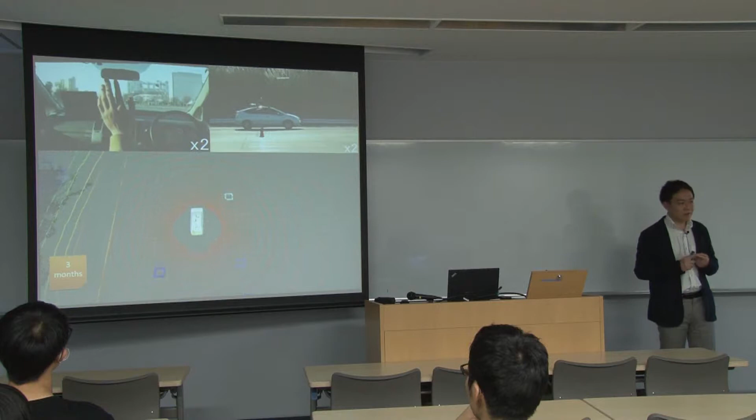But there are a lot of other sensors, such as GPS, laser scanners, round view cameras, and so on. And some people also use millimeter-wave radar. It's not a laser scanner, it's a radar. But our prototype system didn't have a radar. And it's actually up to you what sensors you want to use. So in our case, first we used only a laser scanner. No other sensors are equipped, only a laser scanner on top of the vehicle.

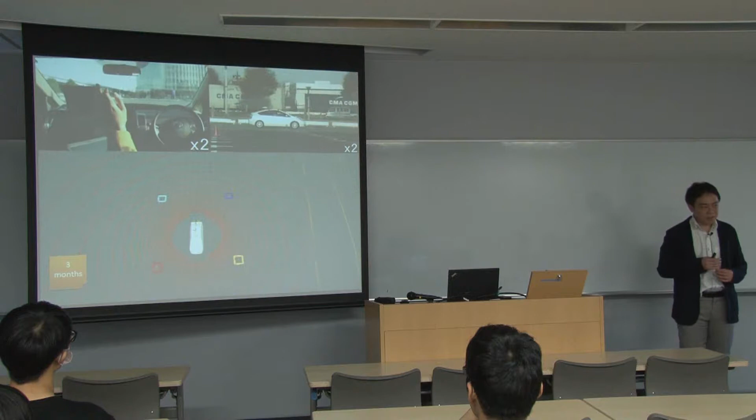And this is 3 months after we introduced the car. Only 3 months, because we made a team formation, including computer science experts and robotics experts. As computer scientists, we are very good at implementing a system. On the other hand, robotics people are pretty good at making the system autonomous. So we made a collaboration, and only 3 months after we made the formation, we made this demonstration.

This is really elementary. It's like a kid, because the car just follows the lane, and once some objects show up, it just stops, and once they disappear, it restarts. But this is the real world, not simulation. It's a real car, a real system in real time. Everything was made by ourselves actually. So this was good, pretty good.

So at this moment, we didn't have a large-scale team. We didn't have this program. We didn't have a specific project at the university. So it was just composed of my laboratory and a couple of other laboratories from other institutes. It's not an official project. It's not an official collaboration. It was just an experimental collaboration, but it did pretty well.

So we decided to make this project more official, and Nagoya University actually started a pretty large-scale national project on autonomous driving. I guess it was based on our outcome. Some of them are my students, and they are still working with me in university collaboration or university-company collaboration. So it was a good connection.

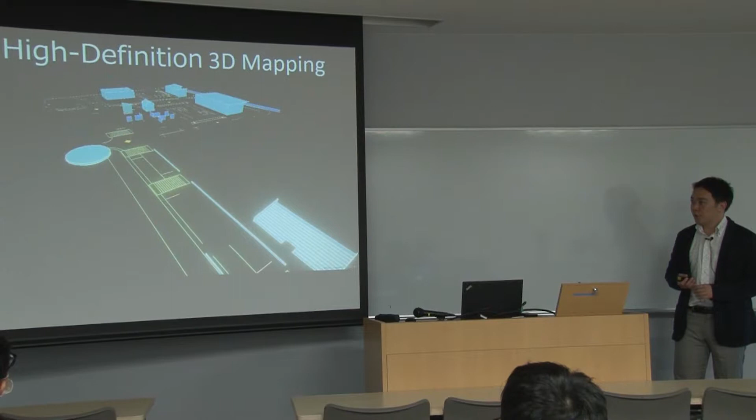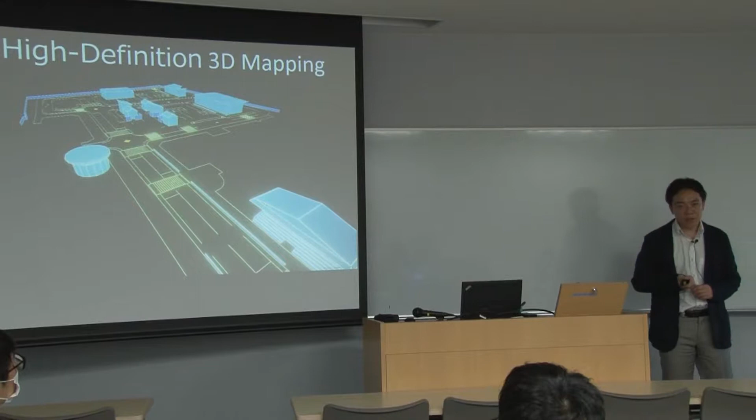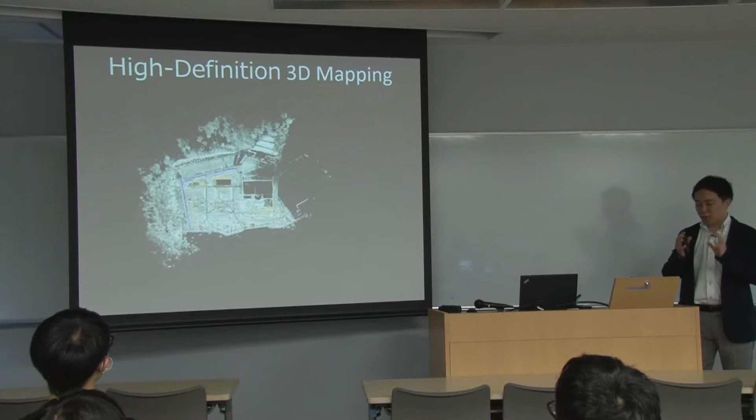So what we did is to make more analysis of the 3D data and extract richer information about where is the lane, where is the building, where is the traffic light, where is the zebra, and so on. Then let's put this extracted information back to the original 3D data. Then you get more and more rich information about geometry. So you know the shape of the place by 3D points, and you also know semantics, what, for example, the place means. Sometimes it may be buildings, sometimes it may be a traffic light.

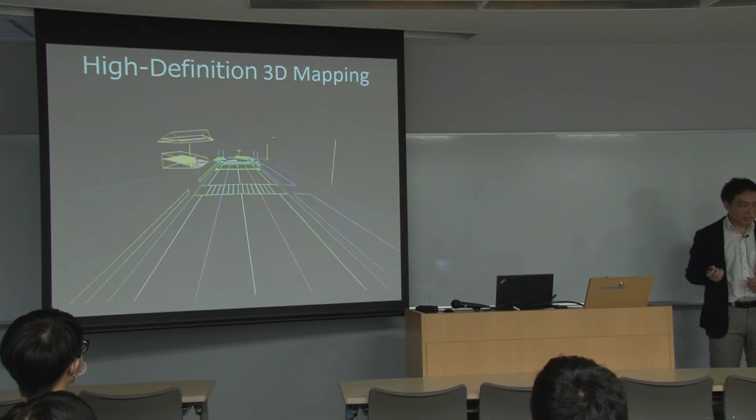And there are even virtual lanes, which were not originally on the road, right? So we extracted such information from the 3D data so that autonomous vehicles can easily follow the center of the lane.

And this was a good collaboration between university and company, because university students don't have time to do hands-on debugging or correcting or checking each piece of points. Instead, the companies are making a business, so they are totally fine with spending some time to construct such 3D rich information.

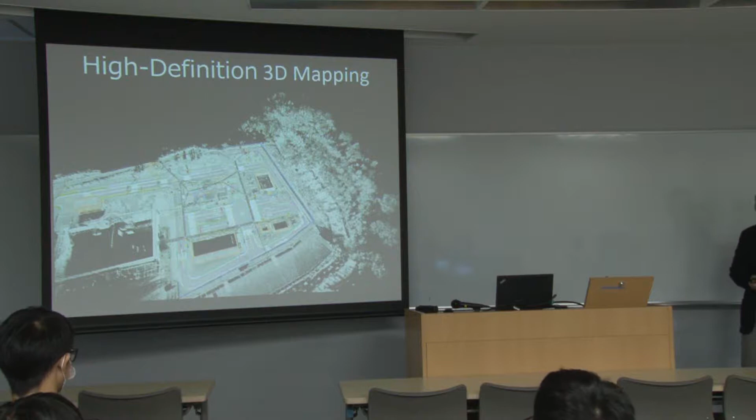And now, how we use 3D data. That 3D data has, I guess, multiple ways to be utilized. But one of our favorites is to use the 3D data for localization. Localization of a driving vehicle means that the vehicle knows where it is driving. So in order to localize the vehicle, we use 3D data, and this is the data from a laser scanner running in real time.

So actually, the data format is pretty similar to 3D mapping data, because it's eventually a collection of points. And there are lots of types of LiDAR in the world. LiDAR means laser scanner, so I use different terms with the same meaning.

And this sensing is also interesting to me because I'm not an expert in this area. When I looked at the data, it looked amazing because it can easily scan real-world data. It runs in real time. And we didn't write any lines of source code, just installed the driver and software for this LiDAR, and when we run the system, we get this data.

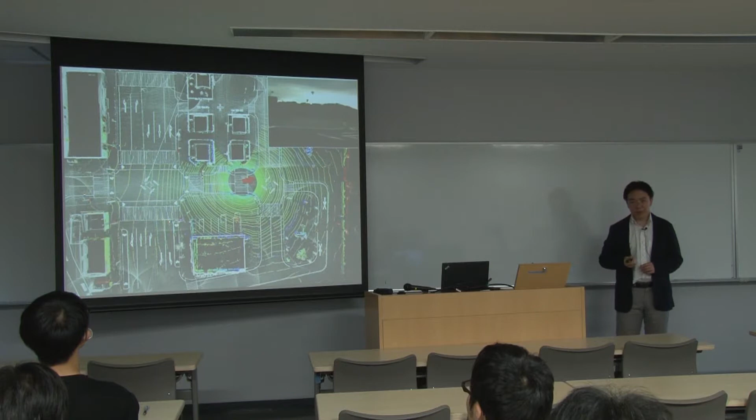matched. So we call it scan matching, and this scan matching is performed every time sensor data is updated. Since the vehicle is driving, moving, the shape of the sensing data is also changing. And every time the shape of the sensing data changes, we repeat scan matching, so that we can trace the place of your vehicle.

And here, this is not a log from driving data. This is the result of localization. We use 3D map data and this scan data by introducing scan matching in order to localize where this vehicle is located within this place. And the accuracy of localization is sufficiently high. It's a scale of centimeters. It's much more precise than maybe highly expensive GPS receivers.

So since we can localize a vehicle with accuracy on the order of centimeters, that allows us to make autonomous driving perform in a city, because in a city you need to know your precise place to the order of centimeters.

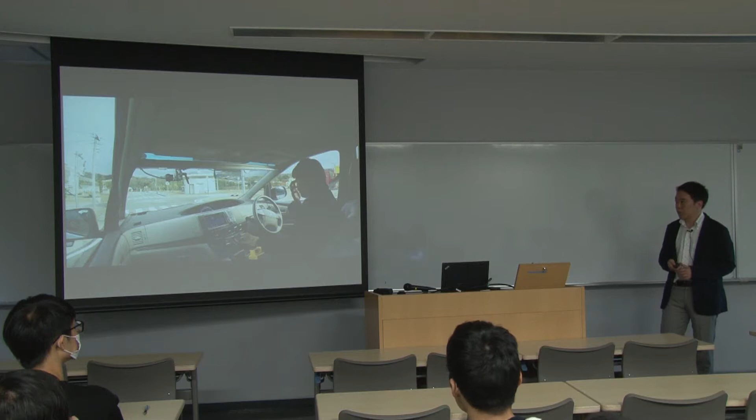So my personal interest in this project was to develop integrated software that includes everything necessary for autonomous driving: sensing, localization, detection or recognition, planning, control. Everything is integrated in the software package.

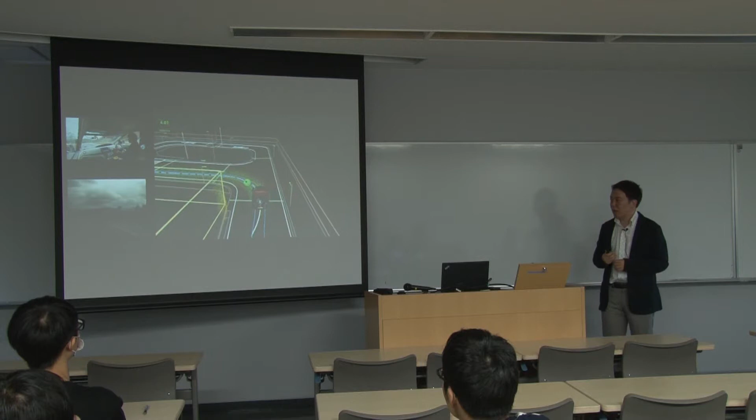And in the same test course, this is a visualization of how the vehicle can understand the real world. So 3D map information is projected, and the vehicle understands where the next zebra crosswalk is, and it also knows what route it has to follow.

In addition, yes, deep learning is maybe one of the potential technologies to make something possible which is currently impossible. And for image recognition, certainly we believe that deep learning performs very well.

For car detection, pedestrian detection, by using deep learning, we are not experts in image processing, but using deep learning tools, we can reach here without involving any experts from image processing communities. Of course, if image processing experts join the project, it can further improve. But right now, we use existing deep learning tools to understand, to recognize objects in the image.

So we are not experts in image recognition, but we are experts in computing. So for example, we like to use GPUs instead of CPUs in order to accelerate the computation. Do you know GPUs? This is somewhat a special device that can accelerate the computation of highly parallel applications. Image processing is one of highly parallel applications, so GPUs are suitable for accelerating such a workload. It is much faster than a CPU.

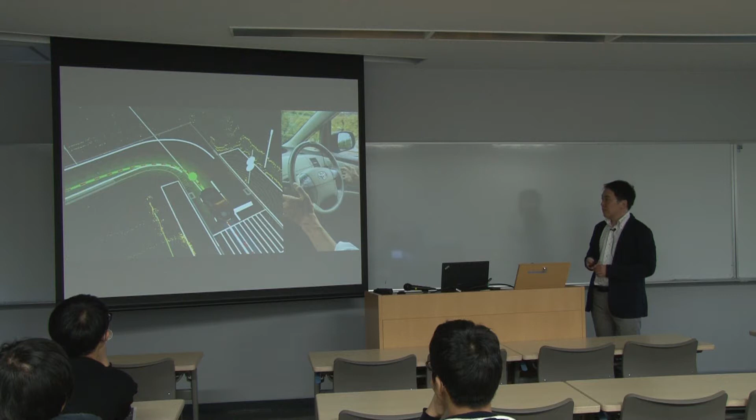One more function would be desired to make the car more practical, which is obstacle avoidance. So far, we can localize ourselves, we can detect objects, we can control the vehicle, and the car can stop. But at this moment, the car still cannot avoid the object. So to avoid objects, you have to generate a path which is not necessarily the same as the original route the car was using. Basically the car is driving at the center line of the lane, but if there is a parked vehicle, you have to change the path of your driving plan.

One of the ways to achieve that is to use spline trajectory. Since the car has velocity and direction information, you can calculate what trajectory the car can take under physical constraints. For example, a car is not a Roomba, it cannot make a sharp turn. So you have to think about some physical constraints on trajectory generation.

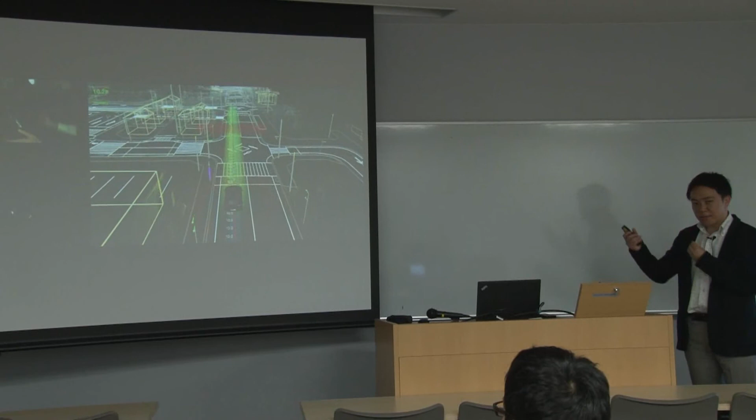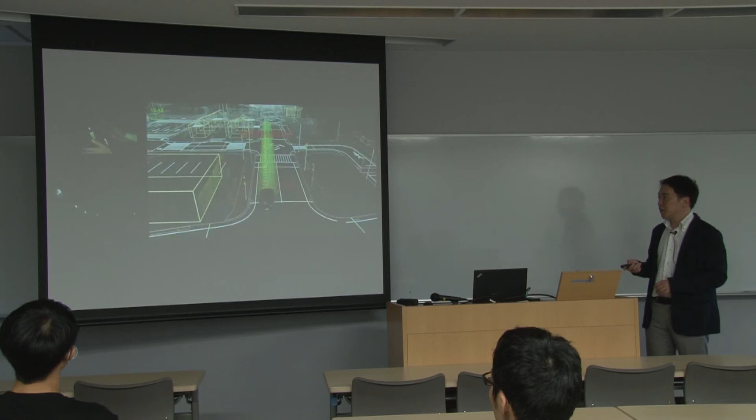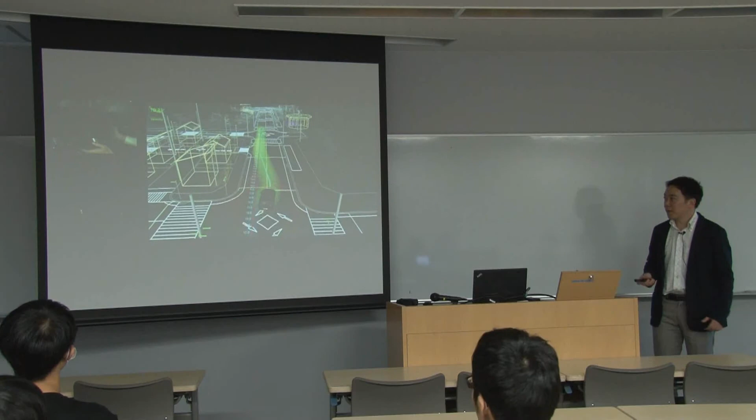One scenario where we like to use obstacle avoidance is to avoid a parked vehicle. Originally, you want to drive at the center line of the lane, but the car detects the parked vehicle here, so you have to change the path. It was selected from one of the trajectories that the car was generating. So the car is always generating this set of trajectories in real time. And at some point, you have to select one if you want to change the current path. And yeah, I can conclude.

So we published the whole pieces of source code that we developed. So if you go to the website, you can download our software, and it includes everything that I showed today. So you still have to buy a vehicle or a sensor or a 3D mapping measurement vehicle, but once you have such a set of hardware, you can implement by yourself, for example, localization or detection or trajectory generation or vehicle control.

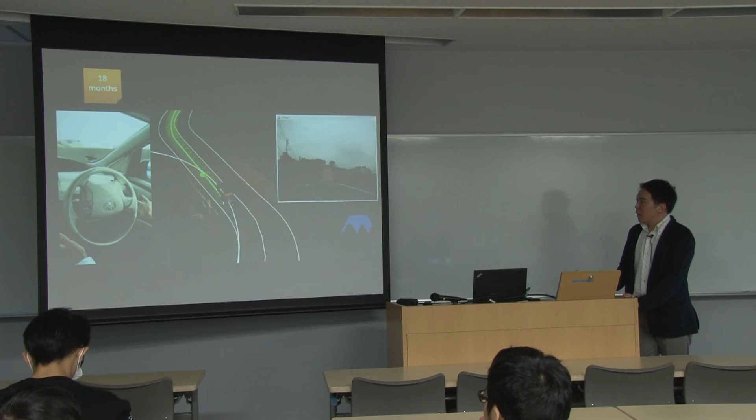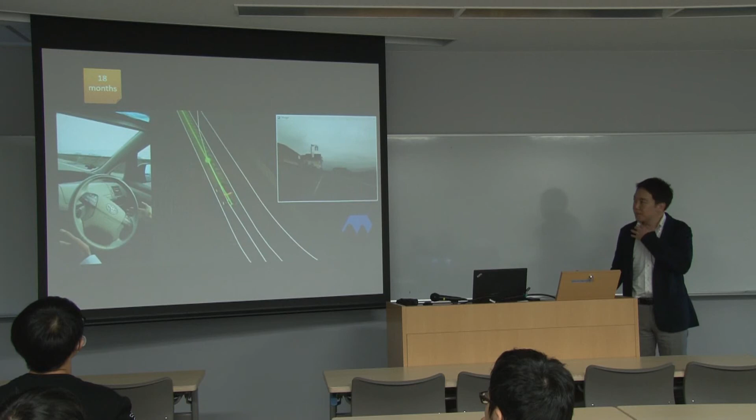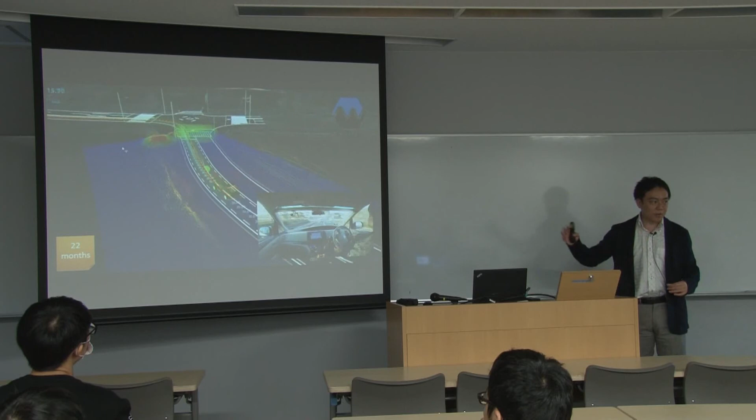And our project is fun because we go to many places to do field testing. This is an island in Aichi Prefecture. This is some city also in Aichi Prefecture. No regulation. We of course negotiate with the police, but there is no closed environment. This is pretty open. Other vehicles are not our staff. They are general customers or citizens.

Yeah, we actually founded a startup company with professors and students using this research project. And we collaborate with Silicon Valley. We like parties, more field testing. More field testing.

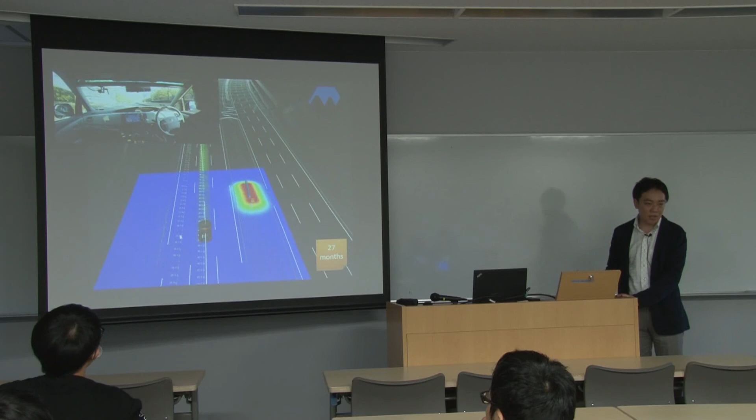Yeah, this is interesting because it includes a lane change scenario, automatic planning of lane change, because the car has to make a right turn at the next intersection. So the car decided to make a lane change by itself. Yes, more field testing. And this is the car we use.

And potential users take a ride on our experimental vehicle, because we want to get feedback from such potential users, asking if an autonomous vehicle is deployed in a city, do you want to use it? Something like that. Or kids. And we called for many engineers, because we want to teach how to use our software.

Sometimes we go to the mountains using the same software, but a different vehicle. This is close to Fujisan, Mount Fuji. Because the car is autonomous, you don't have to look outside. You can get into a virtual world.

When a traffic light is red, what do you want to do? Do you want to keep looking at the traffic light? No, maybe. You maybe want to play some games. But because the car is stopped, you want to also stop in the virtual world in order to feel the same motion.

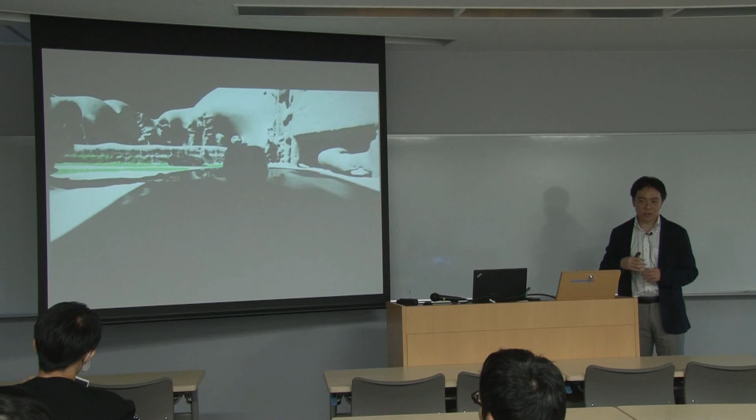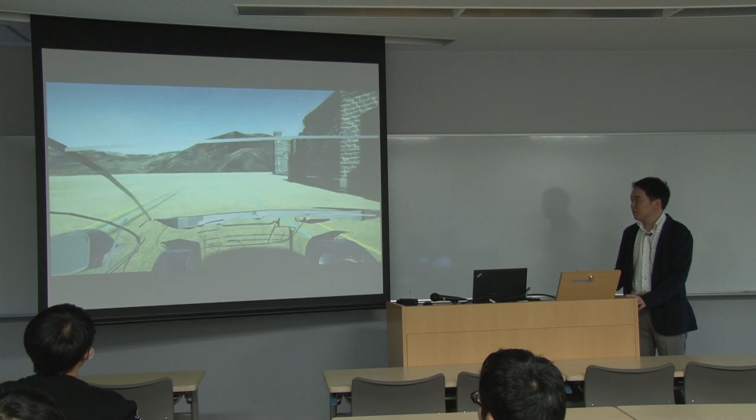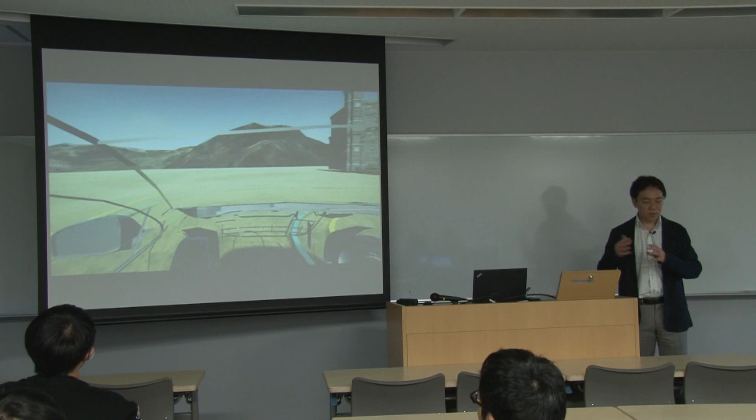Maybe you want to play a shooting game in a virtual world. So if there are multiple users who use our software together and they are connected, you can shoot other vehicles in a virtual world. Don't shoot in the physical world, you will be arrested. Of course, in the virtual world you can do whatever you want. You can put some monsters in the virtual world. So this is all a collaboration of the cyber world and the physical world, the real world.

And we build a car and install our software. So I explained only the software side today, but we also build a car by ourselves because now electric vehicles are getting cheaper and cheaper. So we can collect a team which builds up the real electric vehicle. Then we install our software onto this vehicle and complete an autonomous vehicle. Completely self-contained. Everything is built from scratch.

Okay, this is it. So mainly I talked about autonomous driving, mostly the software side, but we also work on the hardware side. So if you are interested in the project, because Nagoya University has multiple units of autonomous driving, maybe your expertise could be useful to improve the project of Nagoya University. So if you are interested in that, contact me. You can join us for fun.